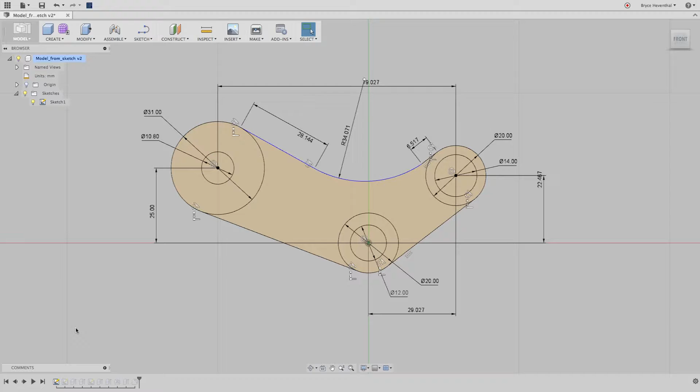So far in this lesson, we've covered how to make 3D geometry using parametrically driven sketches. Another powerful toolset in Fusion 360 is the ability to use free-form modeling driven by T-splines technology. In this example, we're going to use push-pull gestures to form a body into a complex organic shape.

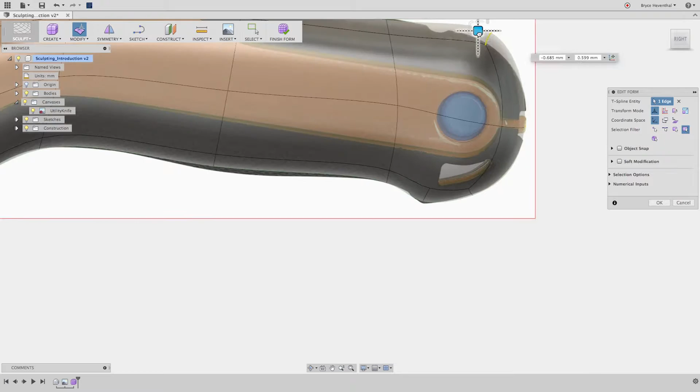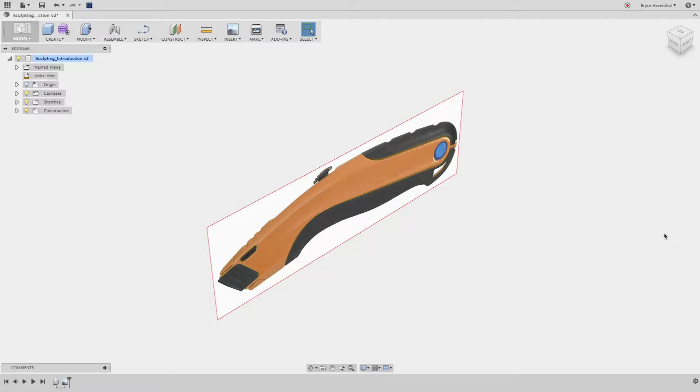We will start our design of a utility knife by inserting an image as a reference. While inserting the image, we can rotate the image and change the opacity so that we can see the design as we make changes. I'll also turn the display through option on so that we can see the image better. And don't worry about this step if you choose to follow along. I've completed this already for you in the practice file.

I want this utility knife to be around 180 millimeters long. So let's use the calibrate tool to aid us in resizing the image to a more appropriate size. Now let's jump to the Sculpt workspace by selecting the Create Form icon. Notice that the toolbars change and give us tools to help us sculpt our design into an organic shape.

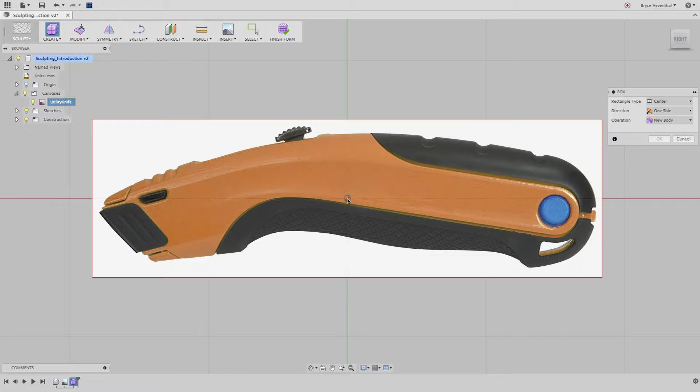Let's start by using a box primitive. We'll start by clicking the origin, then moving the rectangle to a point that is approximately the size of the knife image. Using the dialog, we can change some of the parameters to be more precise. Now I'm going to change the length, width, and height fields.

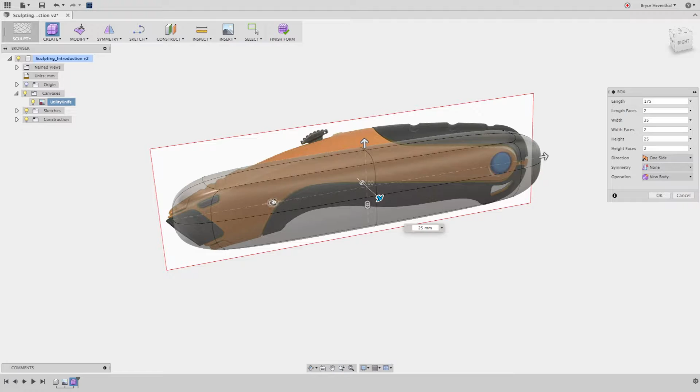Next, I want to add more faces to this body. We want to add more faces to the areas that will be more complex in shape. I can use these sliders to add or remove faces, but notice that it's being done to the entire body in a particular direction. Finally, I'll change the direction to symmetric so that the image goes through the middle of the sculpted body.

This knife will be symmetric about the length of the model. So let's turn on symmetry by selecting the two faces on both sides of the plane that I want to use. Fusion 360 will find a symmetric plane and illustrate the symmetry with a green line.

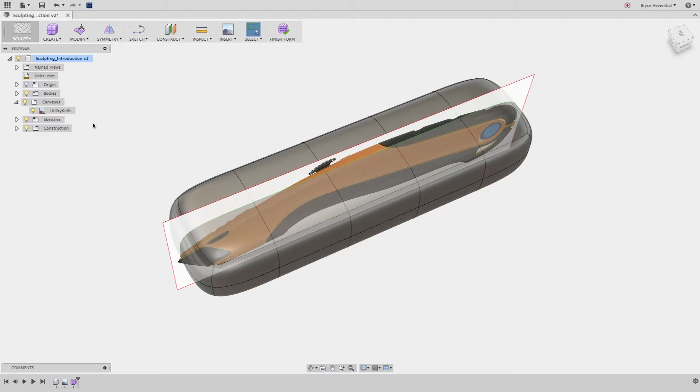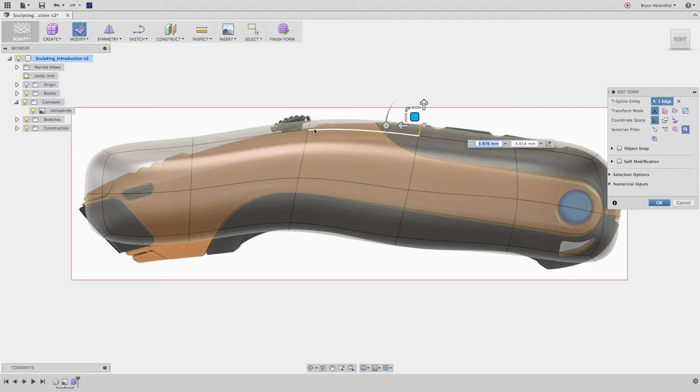Now it's time to start sculpting our shape. Let's right-click and select Edit Form. While in this command, we can select faces, edges, or vertices. When we have an entity selected, we can sculpt the body using the triad. The arrows are used to move in a single direction, whereas the planes can be used to move along a selected plane. Rotation rings can be used to rotate a face.

Multiple faces can be selected by either box selecting, which is a left click and drag to make a box, or hold the Control key in Windows or the Command key in Mac to select multiple objects.

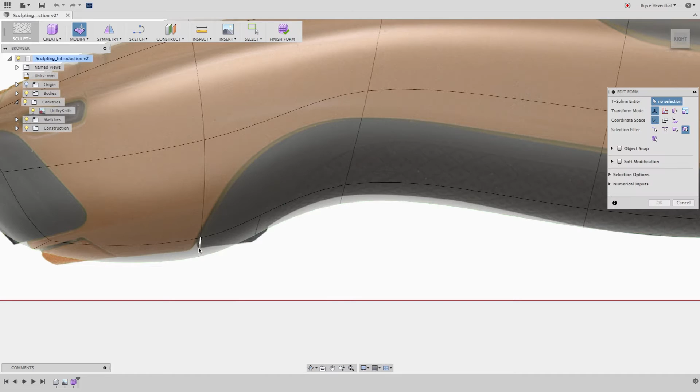In areas of higher detail, we can insert edges by selecting an edge, right-click to invoke the Insert Edge command. The slider is used to locate the edge. Notice once the edge is created, it only affected this face, creating what's called a T-point. A best practice with freeform modeling is to start with a coarse mesh and add edges only where higher detail is needed in the design.

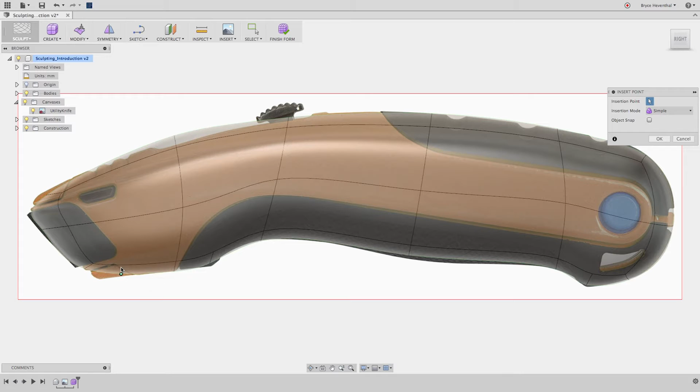Another command that we can use to add more detail to this mesh is the Insert Point command. With this command, we can select 2 points on a face where an edge will be added. And just as before, we will use this to edit the form and sculpt our body.

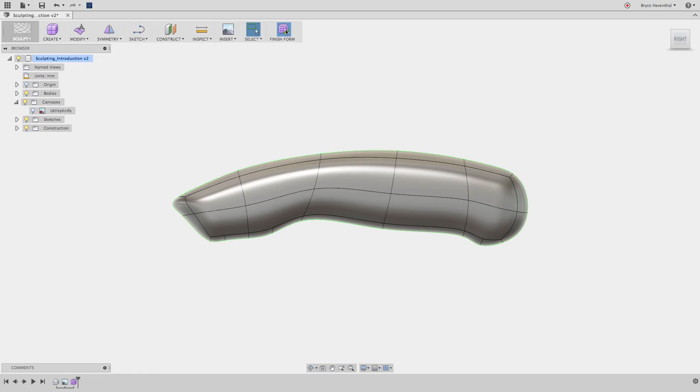Now that we're done sculpting our body, we can select the Finish Form icon. This will throw us back into the Model workspace where we can start to add parametric features like holes and ribs and mounting holes to this solid body.

Well, congratulations on making your first part from a sketch and yet another through freeform modeling. As you become more skilled with Fusion 360, you'll use both modeling techniques, often on the same part. Now don't worry, there are dozens of additional tutorials for you to fine-tune your ninja modeling skills with Fusion 360.